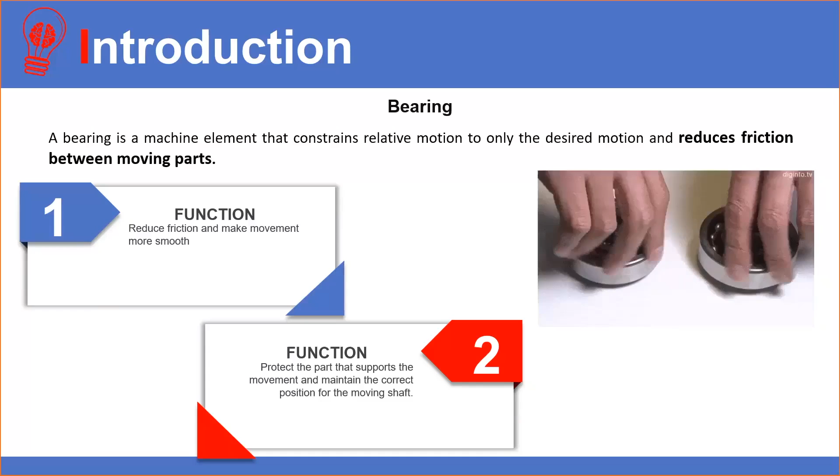So most bearings facilitate the desired motion by minimizing friction. Bearings, in fact, are so fundamental to the machine industry that they have been called the industry's bread and butter because they are used in all sorts of machines. There are two major functions of bearings. The first one is reducing friction and making movement smoother. Friction is bound to occur between the moving shaft and the part that supports the movement. So the bearing serves to reduce friction and allow for smoother movement, and this will cut down on the amount of energy consumption.

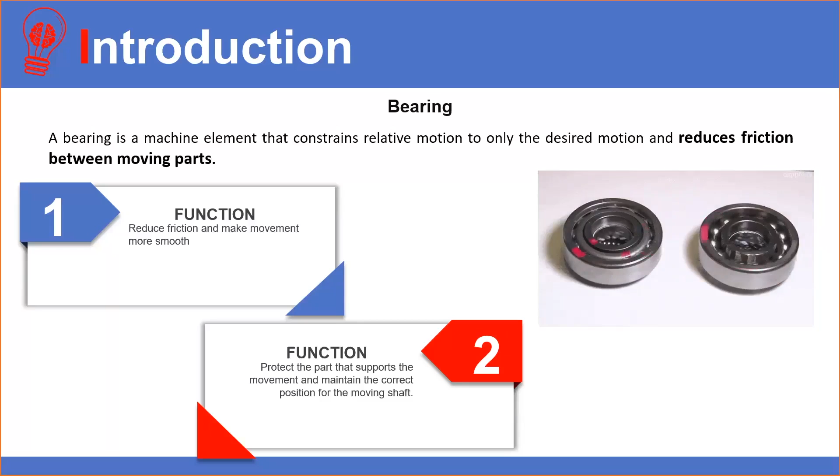The second one is protecting the part that supports the movement and maintaining the correct position of the moving shaft. Normally, a large amount of force is needed between the moving shaft and the part that supports the movement. So the bearing performs the function of preventing damage from being done by this force to the part that supports the movement, and also of maintaining the correct position of the moving shaft.

Okay. Next, friction is a fact of life. Rolling, rotating, and sliding contact interfaces in every human-made, natural, or biological system will generate friction. If not reduced or controlled effectively, excess friction often leads to higher wear losses and ultimately poor reliability and lifespan. Friction's most basic definition is the force that prevents smooth and easy movement of two moving surfaces in contact with each other. With friction comes wear and tear, and thus lubricants in liquid or solid form are needed to prevent this or to minimize the friction. A proper lubricant will reduce friction between the internal sliding surfaces of the bearing components.

On the macro scale, friction is the result of microscopic imperfections in surfaces. On the atomic scale, however, friction concerns the attractive forces between individual atoms. According to Fluid Power World magazine, I quote, design engineers have long searched for material coating methods to reduce friction, but could the restructuring of newly found materials reduce friction on macroscopic scales? So when industry and academia began searching for a material with self-lubricating properties that can be applied on any surface, graphene came into the picture. Graphene, being a two-dimensional material, offers unique friction and wear properties that are typically not seen conventionally. But what is most important is, graphene can be used as a solid lubricant.

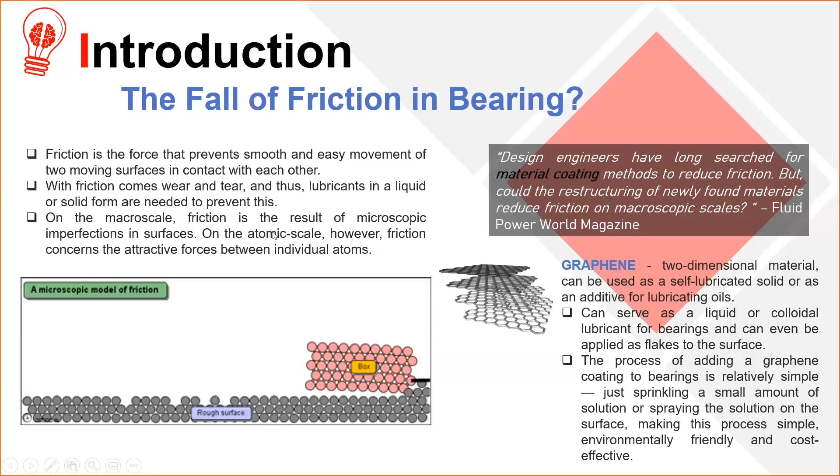Solid lubricants are also known as dry lubricants. By definition, they are materials that, despite being in the solid phase, are able to reduce friction between two surfaces sliding against each other without the need for a liquid oil medium. The most common materials used for solid lubricants include graphite, molybdenum disulfide, hexagonal boron nitride, and tungsten disulfide.

Solid lubricant finds its applications in various fields. One of them is in arthroplasty. Arthroplasty is basically a surgical procedure to restore the functions of a joint, especially the hip and knee, which is normally known as total knee arthroplasty and total hip arthroplasty.

The most common materials used for these kinds of implants include stainless steel, cobalt chromium alloy, titanium and titanium alloy, uncemented implants, tantalum. Tantalum is a type of pure metal, zirconium, and also polyethylene.

For polyethylene, there are a few types, and the one that is used as a solid lubricant is ultra-high molecular weight polyethylene, which has been the gold standard for orthopedic joints for over 40 years after its introduction, due to the combination of superior wear resistance along with high fracture toughness and biocompatibility compared to other polymers.

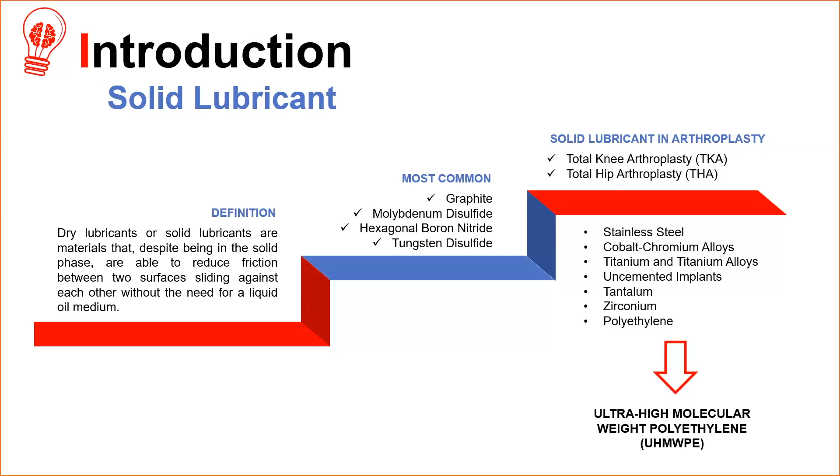So if your knee or hip has been damaged by arthritis, fracture, or any other condition, common activities such as walking, climbing stairs, or getting in and out of a chair may be painful and difficult. Total knee replacement and total hip replacement are normally a last resort when it comes to a damaged knee or hip. Prior to invasive surgery, doctors will recommend everything from physical therapy to stem cell treatments in order to see if a hip or knee replacement can be avoided.

But some patients simply have too much wear and tear on a hip or knee. In this case, if non-surgical treatments like medications and using walking support are no longer helpful, total knee or hip replacement surgery is something to consider.

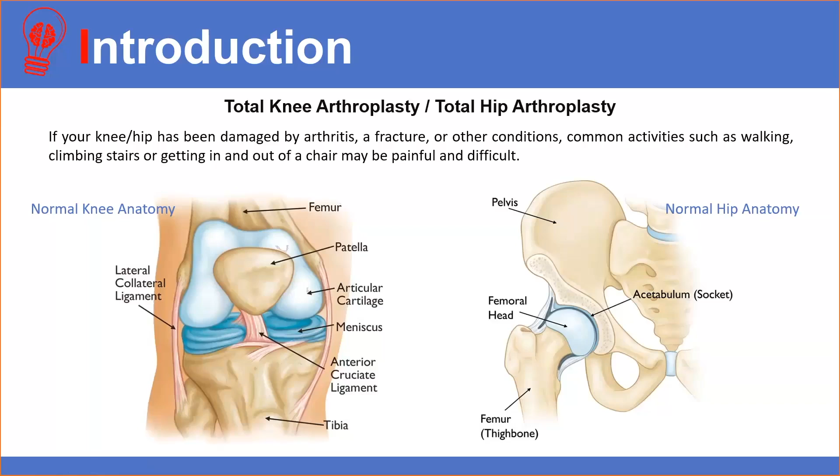The most common cause of chronic hip pain and knee pain is arthritis. Osteoarthritis, rheumatoid arthritis and traumatic arthritis are the most common forms of this disease. Osteoarthritis is an age-related wear and tear type of arthritis. It usually occurs in people 50 years of age and older, but may also occur in younger people. The cartilage that cushions the bones of the knee and hips softens and wears away, causing the bones to rub against each other, leading to pain and stiffness.

Rheumatoid arthritis is an autoimmune disease in which the synovial membrane that surrounds the joint becomes inflamed and thickened. This chronic inflammation can damage the cartilage and eventually cause cartilage loss, pain, and stiffness. Rheumatoid arthritis is the most common form of the group of disorders termed inflammatory arthritis.

The third one is post-traumatic arthritis, which normally happens due to a serious knee or hip injury. Fractures of the bone surrounding the knee or hip or tears of the knee ligaments may damage the articular cartilage over time, causing pain and stiffness and limiting function.

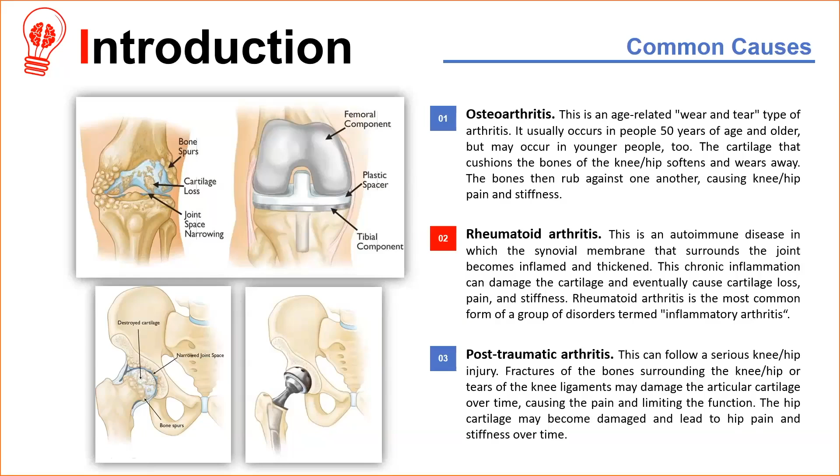Okay, there are a number of hip and knee implant devices available in the market, produced by different manufacturers and constructed in different model types. The materials used are also varied, but the most popular materials are metal, plastic, and ceramic. These materials are used in combinations and mostly seem to fall into one of three basic categories, which are metal on plastic, metal on metal, and ceramic on metal or ceramic on plastic.

Okay, for metal, stainless steel is normally more suited to being used as a temporary implant, such as fracture plates and screws, due to its limited ability to withstand corrosion in the human body. However, one area of concern when using metal is the release of metal ions, such as nickel, into the bloodstream that would subsequently lead to many health issues, including kidney disease and neurological damage, especially for those with a metal allergy.

So compared to metal, ceramic implants seem to be promising for patients allergic to metallic implant materials. High performance ceramics are biocompatible and bioinert and do not elicit any allergic reactions. However, due to their hard and brittle behavior, they have a risk of fracture and cracking.

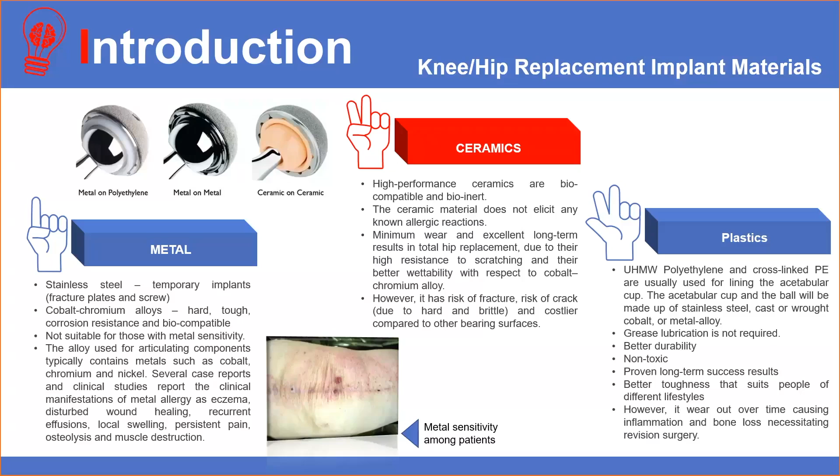Next is the research concept. Okay, the main principle for this research is the micro-bearing concept. Ultra-high molecular weight polyethylene has been used as a bearing material in total joint arthroplasty for more than 50 years now. The idea to replace the degraded cartilage with a polymer liner dates back to the late 1950s.

At that time, Sir John Charnley chose polytetrafluoroethylene, PTFE, which is a low-friction polymer, as the bearing material to replace the natural acetabulum, articulating against a metallic femoral head for hip replacement. However, due to the overly low wear resistance of PTFE, it dramatically failed after a few years of implantation.

So in 1962, ultra-high molecular weight PE came into the picture, a similarly low friction but much more wear-resistant polymer with remarkably better performance. From then on, arthroplasty has seen considerable evolution, but ultra-high molecular weight PE remains the gold standard for artificial hips, knees, and shoulders.

However, it has been demonstrated that the main factor responsible for the failure of ultra-high molecular weight PE in joint replacement is oxidative degradation, which decreases its mechanical properties, including abrasive wear resistance. This leads to the formation of wear debris and consequently to osteolysis, which has been recognized as the main cause of failure in orthopedic implants.

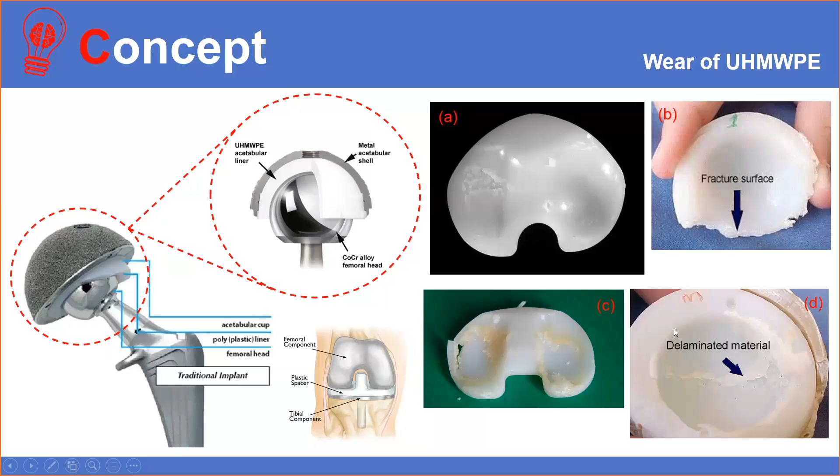This is a zone where a critical molecular mass decrease has occurred and which therefore has very low mechanical properties, resulting in the well-known effect of delamination and fracture typical of such components. Figures B and C show the fracture surface, and figure D shows the delamination on the inside surface which occurred over time. Okay.

So in this study, the main principle of the micro-bearing concept can be applied as the micro-scale ultra-high molecular weight PE filler in the form of tiny particles, which is deposited on the surface of the epoxy composite. The difference in density of the epoxy and ultra-high molecular weight PE leads to the formation of layers that act as lubricating materials to resist the frictional force exerted onto the composite system.

This micro-bearing concept involves the fundamental study of materials rheology, including the non-Newtonian shear thickening behavior of polymer in relation to viscosity and density. When the ultra-high molecular weight PE filler was incorporated into the epoxy resin, the situation where the density of epoxy resin, which is about 1.12 gram per centimeter cubic, is higher than the density of ultra-high molecular weight PE, which is around 0.92 gram

per centimeter cubic, will encourage the microparticles of ultra-high molecular weight PE to accelerate upwards and float until partially submerged during processing before it undergoes the curing process, forming two distinctive layers. Upon curing of the polymer composite, the ultra-high molecular weight PE filler will be turned into a layer of solid lubricant on top of the epoxy composite system.

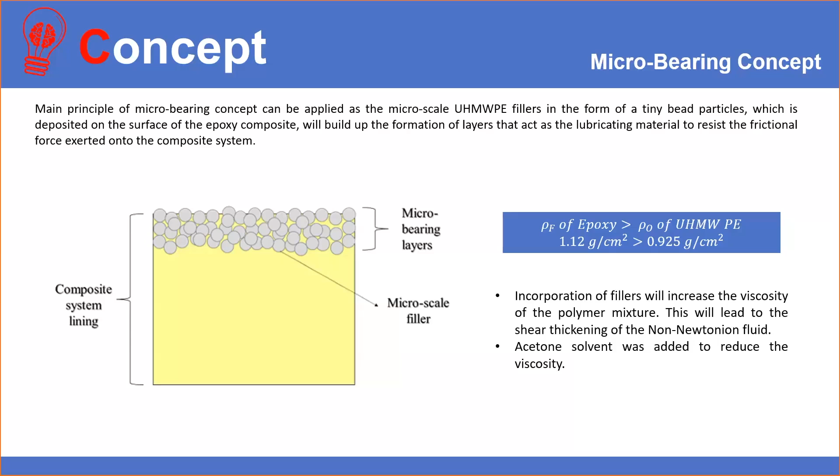For this study, epoxy was chosen as the matrix because epoxy, once fully cross-linked, is an inert material and mechanically stable. Epoxy has been widely used as a coating for metallic orthopedic devices such as prosthetic joints and dental implants made from titanium.

Okay, for the methodology. After much trial and error and preliminary study on the method, this can be said to be the optimum method, which involves mechanical stirring of the epoxy and ultra-high molecular weight PE mixture, followed by sonication to further improve the dispersion and break down the agglomerated particles. Then the addition of acetone to lower the viscosity of the epoxy resin, and lastly, the addition of hardener to

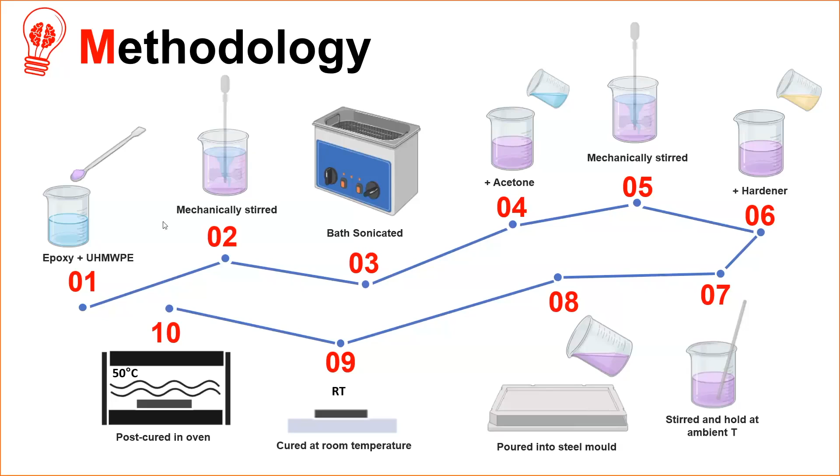initiate the curing process. Next, the mixture was put into the mold, left to cure at room temperature for 24 hours before post-cure in an oven at 50 degrees C for another 24 hours. Okay, this is just the summary of the method. Okay, this is the final formulation.

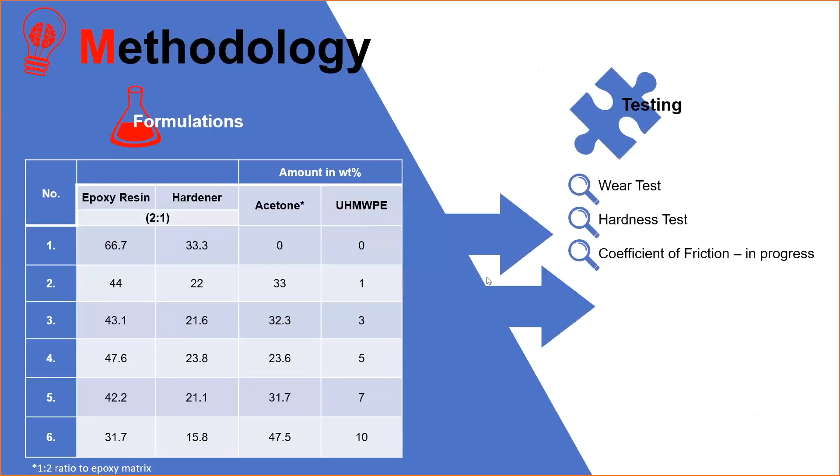There is only one variable, which is the amount of ultra-high molecular weight PE, varied at 1, 3, 5, 7, and 10%. The optimal ratio of acetone was kept constant at a 1:2 ratio of acetone to epoxy resin. The tests involved for this part are wear test, hardness, and coefficient of friction test, which is still in progress. Okay, for the results and discussion.

Okay, this is the plotted graph of the wear test result and hardness test result. The wear test was conducted at 6 Newton load and 10 cm sliding distance for 3 hours using a stainless steel pin according to ASTM G132-96. The specific wear rate was plotted against increasing percentage of filler loading. As can be seen from the graph, the specific wear rate of neat epoxy is about 7 times 10 to the power of negative 5 millimeter square per Newton meter.

The incorporation of 1 weight percent of ultra-high molecular weight PE reduced the wear rate of the composite by about 53%. As the amount of ultra-high molecular weight PE filler increased from 1 weight percent to 3 weight percent and 5 weight percent, the specific wear rate shows a small gradual reduction trend of 7% and 6% respectively.

For 7% and 10% filler loading, the reductions in the value of specific wear rate are quite obvious. When the filler loading increased from 5 to 7%, there is a 36% reduction in wear rate. As the filler loading was further increased from 7 to 10%, a 50% reduction in wear rate was observed.

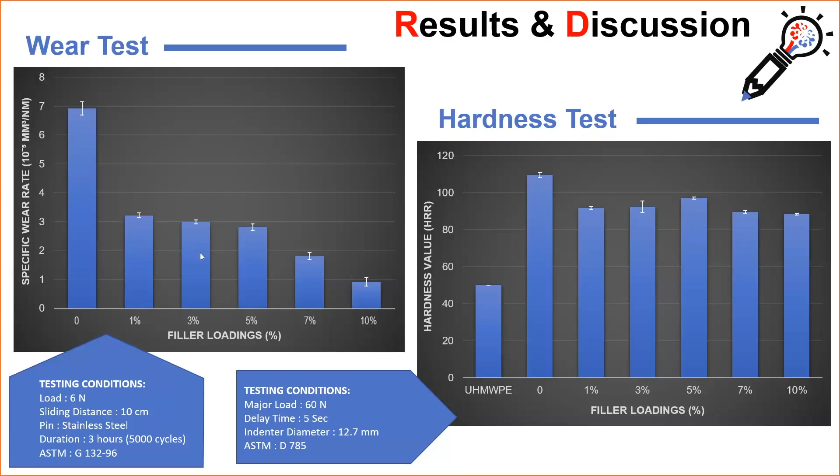The incorporation of ultra-high molecular weight PE in the epoxy system seems to produce two distinctive layers, which can be seen from figure 1, taken from lateral view under polarized optical microscope at 5 times magnification. This is as predicted due to the difference in density of epoxy and ultra-high molecular weight PE, assisted by the reduction in viscosity of the epoxy resin by acetone.

In figure 2, we can see that there are certain smooth areas which correspond to the ultra-high molecular weight PE particles. From the result of wear test and hardness test, two possible conditions could be derived depending on the amount of filler loading, based on the graph. Filler loading at 1, 3, and 5 weight percent can be categorized as low filler loading. On the other hand, 7 and 10 weight percent can be classified as high filler loading.

For low filler loading, the deposition of ultra-high molecular weight PE particles on the epoxy surface seems to be encapsulated by a thin layer of epoxy, as illustrated in figure 3. The presence of this thin layer of epoxy contributes to the increasing hardness value up to 5 weight percent filler loading due to the stiffness of the epoxy itself.

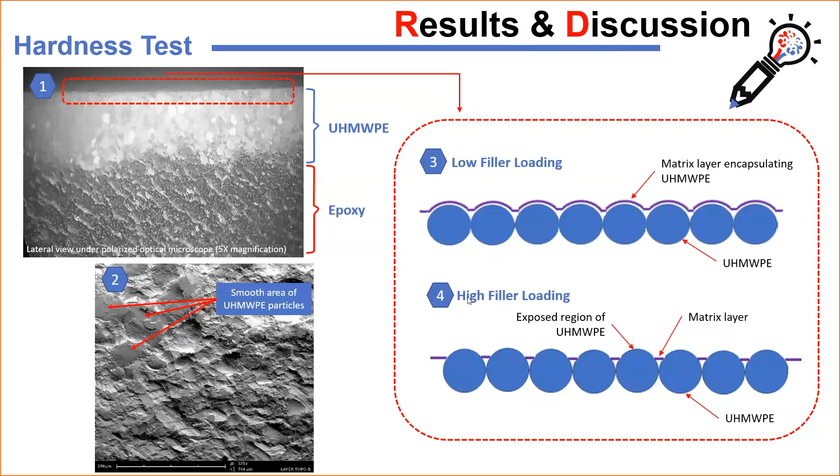Lastly, for the conclusions, the ultra-high molecular weight PE microbearing concept in epoxy composite has a potential to be developed as implant material due to the strength of the epoxy and the low coefficient of friction and high wear resistance of ultra-high molecular weight PE. The incorporation of ultra-high molecular weight PE inside the epoxy resin seems to reduce the friction on the composite surface by forming a layer of solid lubricant on top.

However, this project still has a very long way to go. Detailed study and analysis need to be done on the effects of the materials on human health. Besides implant material, this microbearing concept composite can also be developed for other applications, such as sliding rails for doors and windows. This concept will probably eliminate the usage of rollers or grease to reduce the friction.

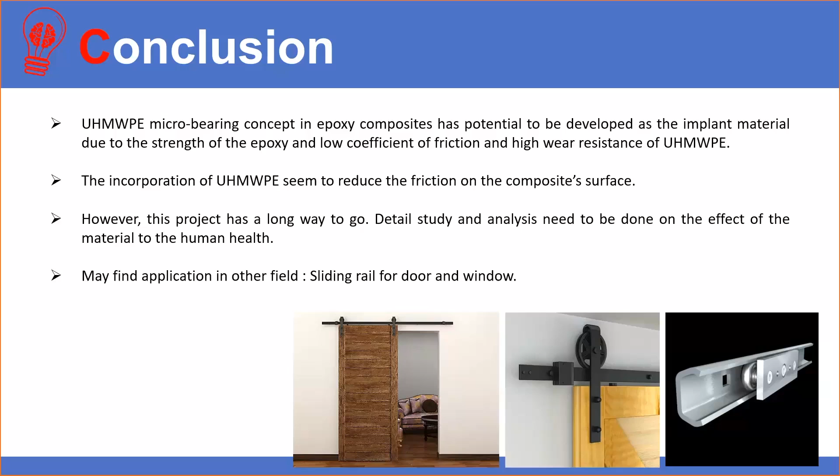Thank you, Dr. Nick, for a very informative presentation. So now I believe that we need to take good care of our knee joints and hip, and get enough calcium so that we do not end up wearing a plastic knee, isn't it, Dr. Nick?